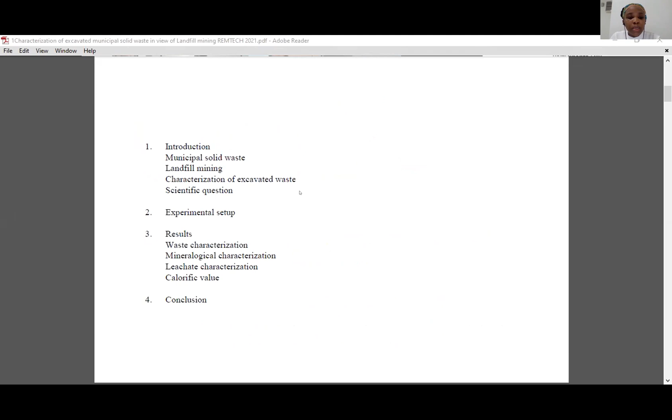In the last year, it has been found that the generation of municipal waste has increased, and it is expected to rise to 2.2 billion tons by 2025. Asia alone accounts for 70 million tons of municipal waste, and this generation accounts for 26% in Southeast Asia.

As we can see here, the kilogram per capita per day only in Malaysia has increased from 1.1 kg to 1.2 kg. Because of population expansion, there is demand for land as waste increases gradually. Among the 146 operating landfills, only 18 are sanitary landfills, so more than 50% of the others are still open dumps.

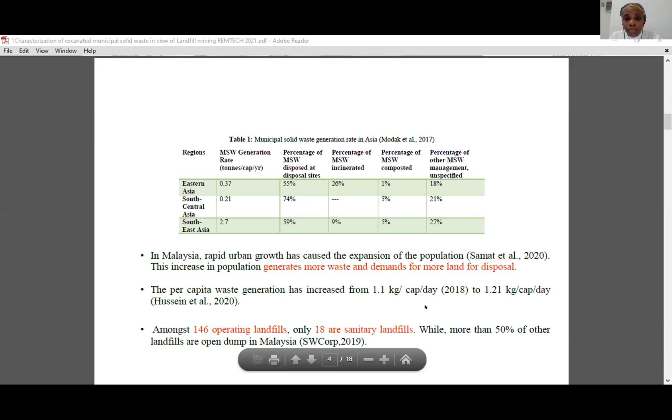Landfill mining comes as an opportunity to obtain minerals or other solid resources from excavated waste material. This method was first used in Tel Aviv in 1953, for the purpose of remediation but also to recover landfill space.

Is it really a solution for the Malaysia case? Our study will help us define and answer that question. But potentially, there is still not a great role in the segregation of waste, so most municipal waste ends up in the landfill because separation at collection is mostly inexistent, if not rare.

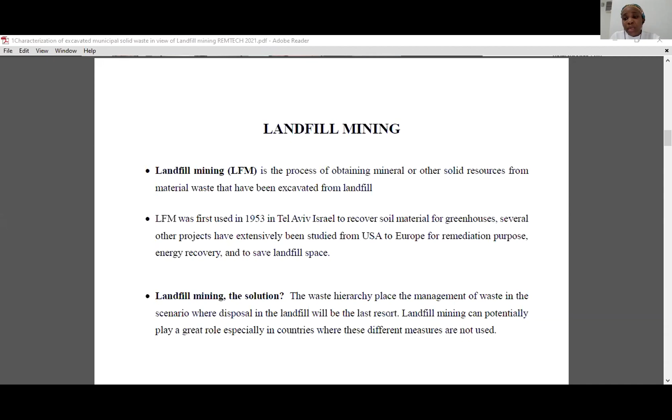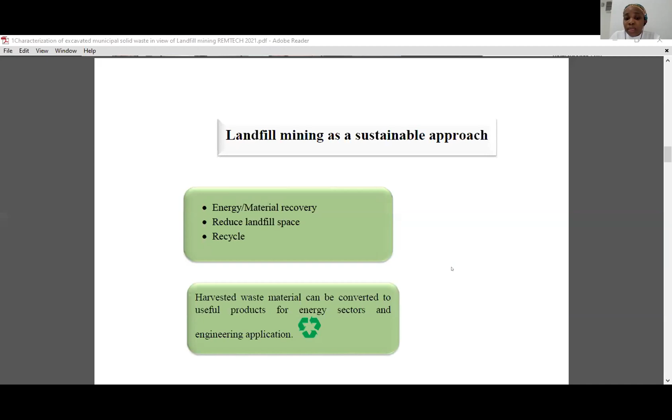Landfill mining as a sustainable approach can help us recover energy or material. In our study, the main objective is to reduce landfill space so it can be recovered for a recreational park, with the landfill converted into such a park. The material harvested will be converted for energy or engineering applications.

Our methodology: the waste was excavated from the landfill and collected at Jeram Sanitary Landfill here in Malaysia. After collection, the waste underwent characterization, and from that characterization, the opportunity for waste to energy was explored.

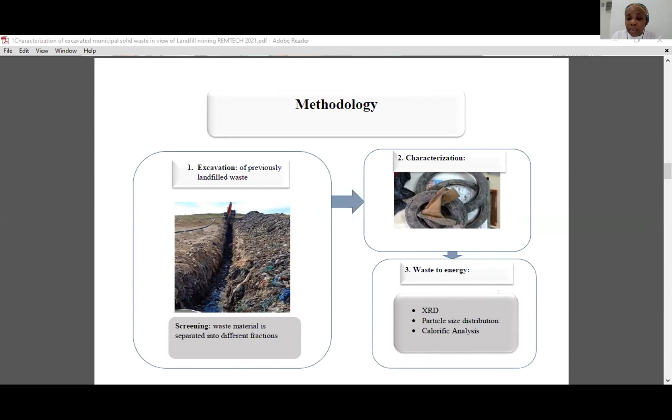We used XRD to determine the material in which energy potential can be found. We also used particle size distribution because we wanted to determine the fraction where the flow of the desired material is mostly found. Then we proceeded to calorific analysis to determine the heating value.

Some of the questions we asked are: what are the different types of material excavated? Does waste material characterization really influence landfill mining? And is it possible to implement landfill mining for profitable recovery in this case?

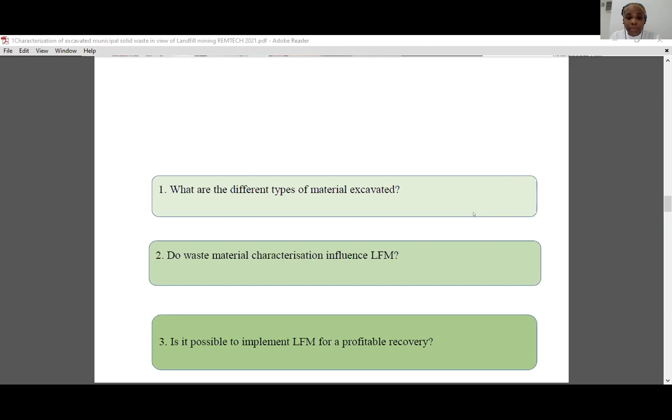Our experimental plan and analysis consists of step 1, excavation; step 2, characterization; and step 3, valorization options. After excavation, the material was dried, then sieved and separated into different fractions: plastic, metal, textile, wood, paper, cardboard, glass, and ceramics, then characterized through the different analyses previously cited. Then we explored the valorization options.

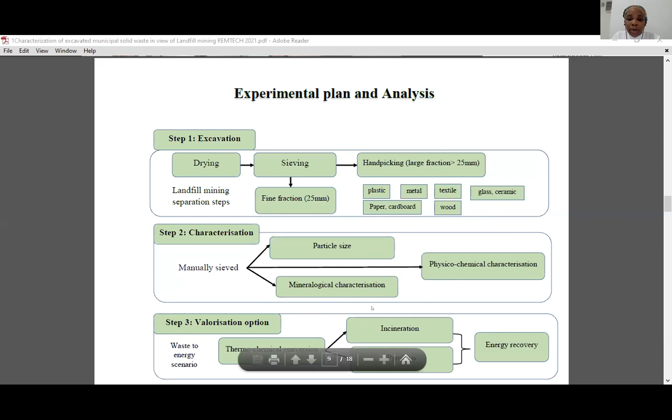The results show that among the excavated waste, we predominantly found plastics and fine material. That fine material, also called soil-like material, is mostly the organic fraction. Based on the physico-chemical analysis, the moisture content was also very high.

From the plastic, we also found that plastic is predominant, accounting for 36% of the waste composition on a dry basis, compared to fine material which was 34%. The combination of the two materials was also studied to know the potential for recovery, as well as studied separately.

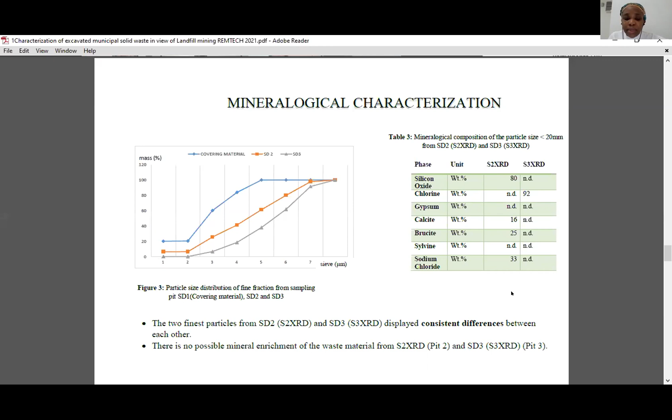And we found out also that there is a great amount of chlorine, and that was found in the pit, and in XRD. Also, the mineralogical analysis show us that...

the sample that undergone through XRD display the presence or occurrence of gypsum. That gypsum must be originating from the construction and demolition waste that has been deposited in the landfill. And one of the suitable treatments for this fine material will be...

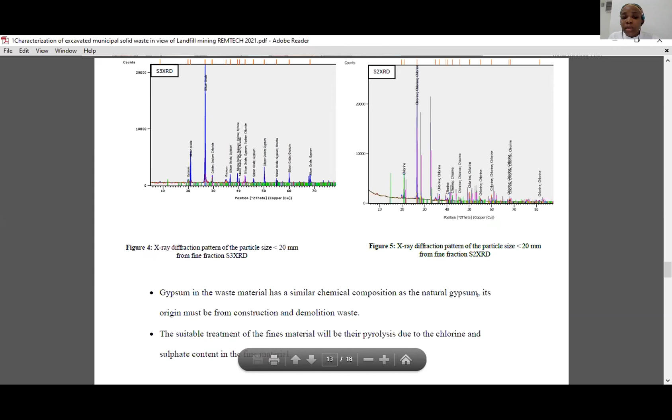pyrolysis, due to the chlorine and sulfate content that was found in the material. So the leachate characterization helps us to define which treatment can be done to the waste, because after excavation, we found out that there is a discharge of contaminants of new nature, which are methylene chloride, phenol, 4-methyl, and hexadecanoic acid, ethyl ester. These contaminants are mostly because of the heterogeneity of the waste and the degradation of the plastic

that have been piled in the landfill. So they are still occurring because of this heterogeneity. So more study needs to be done to know how the material and their occurrence affect the landfill mining.

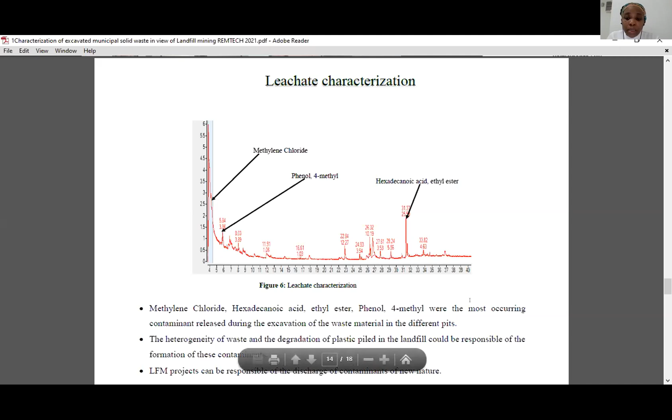The valorization option for one opportunity could be in the combustible fraction, which is plastic. And we have found out that the plastic has a potential to be recovered that is higher compared to the fine material. Based on the ultimate analysis, we found out that most of those materials, plastic and fine material, are

mostly bound to organic material in the waste. So the fine material can also be valorized as a fertilizer or compost, depending on the quality of the material that still needs to be studied. The geochemical analysis needs to still be done to define if the material is potentially viable for the landfill mining study.

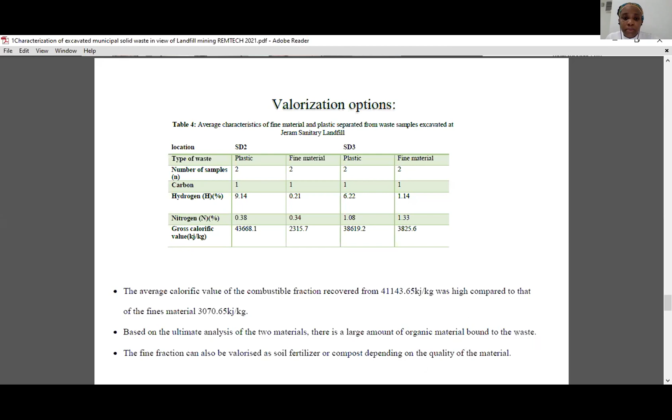So for the heating value, after separating the waste, the different materials underwent heating value and calorific value testing, and we found out that plastic also has a high potential of energy recovery compared to fine material. The energy potential shows a heating value of 166,897 kilocalorie per kilogram of the excavated waste, and the total recovered energy for that cell could be estimated to...

478,352.25 kilocalories per kilogram. So there is great potential for plastic, and for fine material or soil-like material, to be recovered from the landfill in order to process landfill mining.

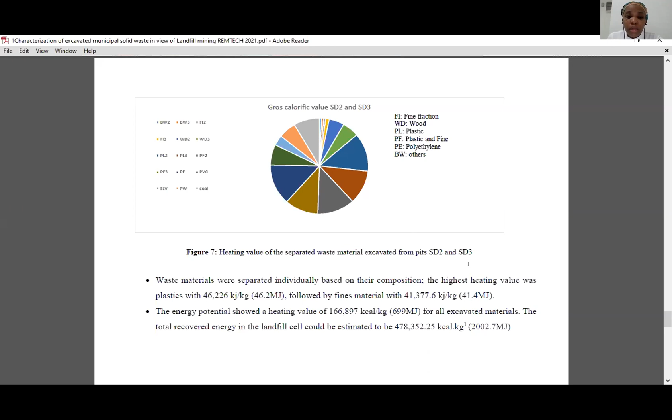So in conclusion, we have found out that plastic and fine material can be used for energy recovery. Their economic values still need to be explored, and further treatment for fractionation of those wastes needs to be done to optimize the energy recovery, and the quality of the excavated material still needs to be investigated.

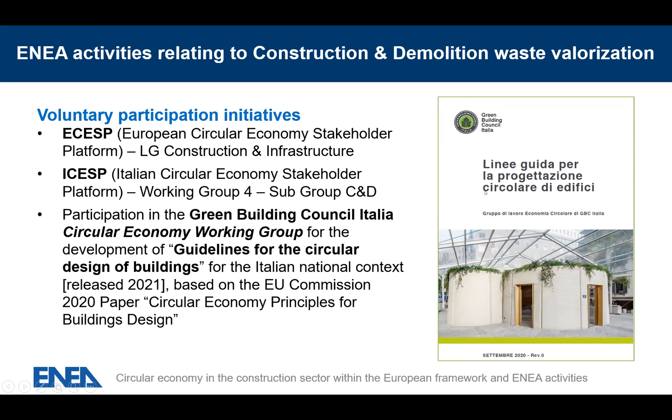In 2020, with the leadership group on construction, we published an orientation paper, which is public and available for everyone to download, where the leadership group defined 6 priority areas of intervention to promote circularity in the construction sector. Just to give you an idea of what we've been working on together with other relevant stakeholders in Europe.

We identified, for example, that integrated policies and governance, as well as metrics for circularity in the construction sector, are needed, but also integrated tools to foster interconnections between the construction sector and other productive sectors that could have exchanges in terms of flows of materials usable within construction.

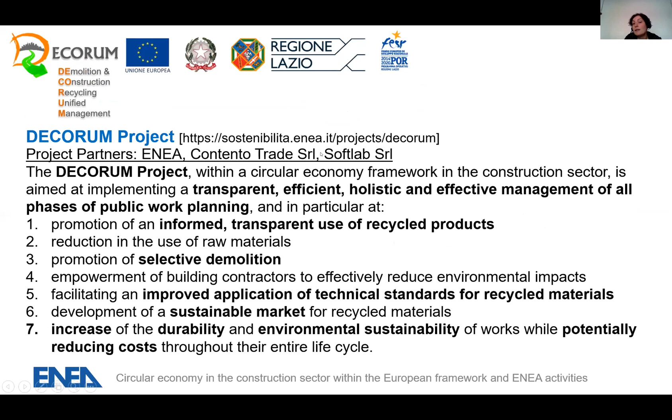This project led to the creation of a platform in support of all actors within the construction supply chain, to help them in the decision-making phases, and in order to facilitate the inclusion and adoption of secondary materials for the construction sector, and in order to promote the compliance of works with sustainability criteria.

In particular with our national minimum environmental criteria for green public procurement, which are mandatory. And this platform also has a marketplace that promotes the availability, reliability, and accessibility of secondary materials for construction.

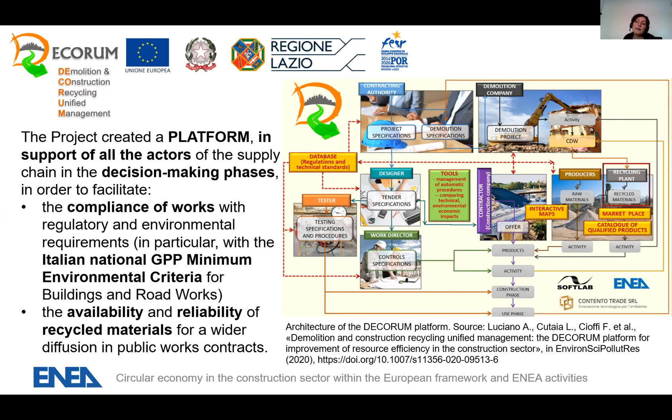Within the ESPA project, ENEA is working, as I said before, on many different tools to transfer all these innovative and circular approaches to public administrations.

In particular, we've been working on 3 tasks, 3 different activities: one concerning environmental certifications for public buildings, so we've been developing guidelines for public administrations to adopt these rating systems for buildings. And then we've been developing 2 specific activities on circular economy for the construction sector.

One regarding the preparation of guidelines to estimate the quantities and typologies of materials that can be recovered from existing buildings, so in an urban mining approach. And the last activity regards a report that has already been published and is available upon registration at the link you can find in the slides, a report that collects and systematizes different methodologies and technologies available to recover components and materials from existing buildings.

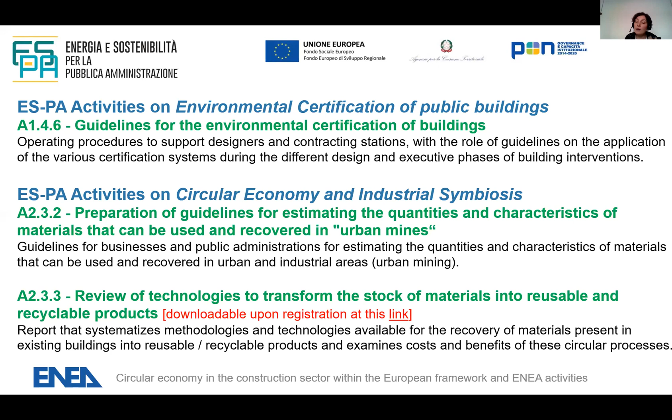So this report looks at selective demolition and different technologies to recover and make components available for reuse, or materials available for recycling.

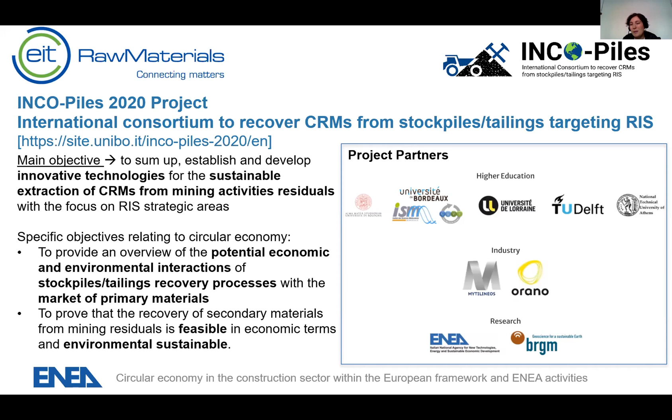One last project, to be presented by our colleague Francesco Tinti later this afternoon, is the INCO-Piles project, financed by the EIT within the KIC raw material. It looks at the possibility to recover critical raw materials from mining activities residuals, known as stockpiles and tailings. At ENEA, within this project, we are looking at how these circular processes might represent a real occasion for sustainable economic development, and we are assessing the environmental impacts that can be avoided by recovering critical raw materials from these residues instead of mining them from primary sources. These projects will be described later in more detail.

Thank you very much. I'm here for any question.

Paula, thank you very much for your exposure. I would like to ask everyone, do you have any question for Paula? Anyone? No doubts, people. There also might be some questions in the chat, to be discussed during the discussion session, so maybe it will come. Juliana, we don't take questions at the end of the speech, just in the discussion panel. The end. Okay, perfect.

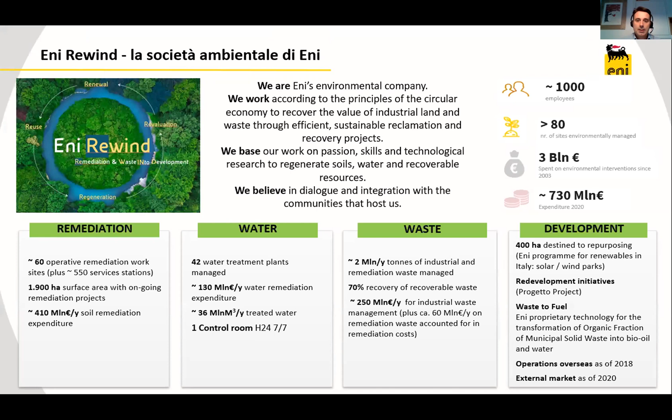Before going into the details of this project and this technology, I would like to provide some information about the framework, the context. We are in Italy. In Italy, we apply municipal sorting waste collection. In 2019, we reached 61% of sorted waste collection, with more than 18 million tons of waste sorted in this year. Of this amount of waste, the main impacting fraction is organic waste, which in 2019 amounted to more than 7 million tons of waste. So you can understand we are speaking about quite half of the entire sorting collection.

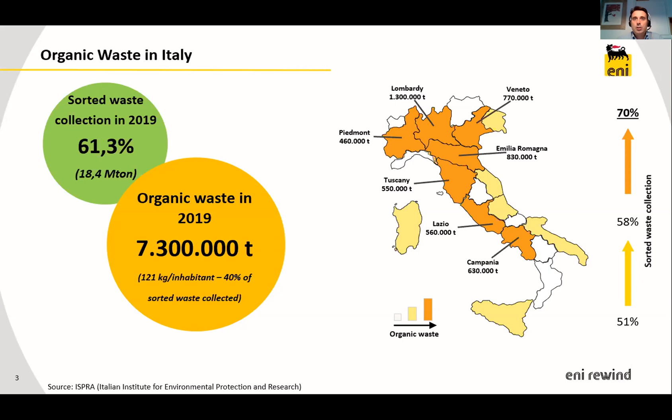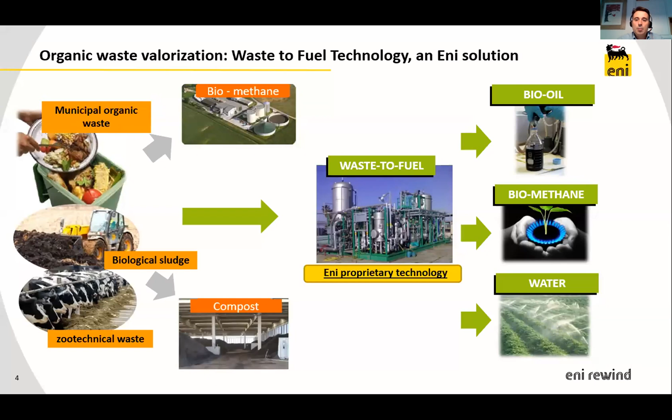So organic waste is one of the most important portions of sorted waste we have to manage in Italy. Currently, there are 2 technologies commonly used to manage this typology of waste: anaerobic digestion, which allows production of biomethane, and composting, which allows obtaining compost. The solution proposed by Eni is a third way, named waste to fuel, and as we will see in the next slides, it allows production of bio-oil, biomethane, and water.

The technology patented by Eni comes from the Research and Development Department of Eni, and it tries to emulate what nature already does. We know that hydrocarbons, coming from organisms captured underground, after millions of years can be extracted and transformed into fuels. In a similar way, starting from organic waste but applying a technology where, in a very limited time, about 2-3 hours, through a process of hydrothermal liquefaction, we can obtain a bio-oil with characteristics really similar to fossil fuel, which can be used in a similar way to produce fuels for automotive, for example.

In a waste-to-fuel plant, we have several sections. The first section is a pretreatment that removes components not related to the organic fraction, like wood, plastics, and metals that can be present due to errors in the sorted collection. After that, we have a grinding and homogenization phase that allows us to obtain organic waste ready to be sent to a reactor. The reactor is the core of the technology.

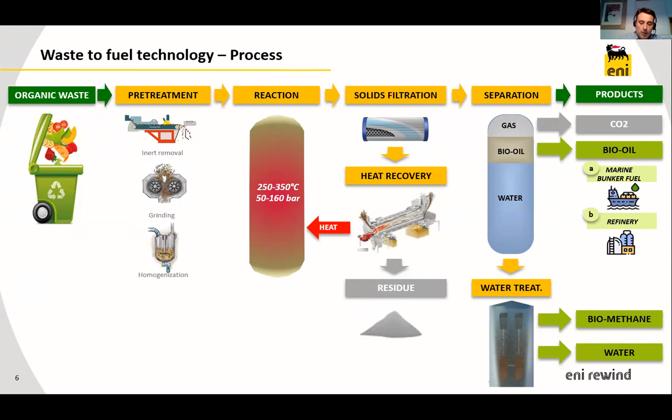Coming back to the gas-liquid solution, through a separator we can remove CO2, and then the liquid part will be separated into bio-oil, the product that will be commercialized, and water that will be sent to a water treatment section, where we can also produce biomethane and recover the water originally contained in the organic waste. So to recap, starting from the organic waste on the left, we obtain through this process 3 products: bio-oil, the characteristic product of this transformation, biomethane, and water.

The yield of this transformation varies depending on the composition of the organic waste, in particular depending on the solid content, and especially on the percentage of fatty substances and proteins. The bio-oil, depending on those characteristics, can vary in yield from 3 to 16% of the total waste input.

The other products include biomethane, obtained during the water treatment process because we also apply anaerobic digestion of the water, but this is a very small quantity, around 1% of the total waste input. And finally, we have the water.

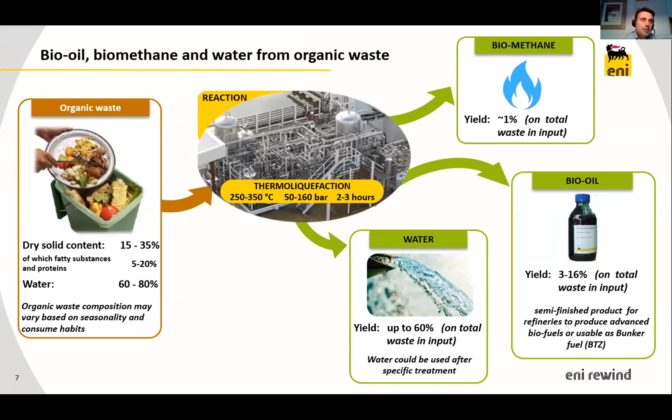The organic waste is mainly composed of water, which can reach up to 80% of the total composition. We are able to recover an important portion of this water, up to 60% of what is originally contained in the waste.

Due to these characteristics, we can use the bio-oil produced through this transformation directly as a marine bunker fuel for maritime transportation, but in formulation with traditional fuels because we have to reduce the acidity. Otherwise, we can use this bio-oil to produce electricity or in refinery processes to obtain traditional biofuels, for example for automotive use.

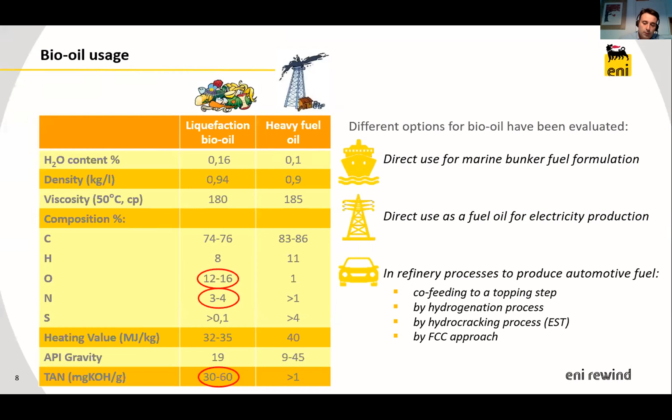What is the status of implementation of the technology? The technology was tested for the first time in 2013 through an experimental plant built at the Eni Donegani Research Center in Novara. It was a very small plant, but really important because it demonstrated that the transformation was effective.

Then in 2018, a new plant was built in Gela. It's a pilot plant, a larger plant currently in operation. Thanks to the information collected from this plant, we are also designing the first implementation on an industrial scale, which we expect to realize in Porto Marghera, close to Venice.

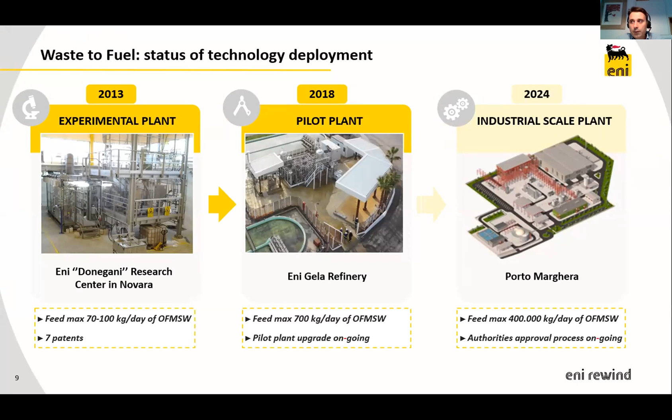We use this plant to organize long-run tests that allow us to collect information about production in continuous operation, to verify the overall process, verify the design, and collect lessons learned useful for the industrial scale design. We have also started some activities to upgrade this plant because, collecting information about this technology over these 2 years, we were able to define some opportunities for improvement. So we are also doing some upgrading activities that we expect will improve the performance of this technology.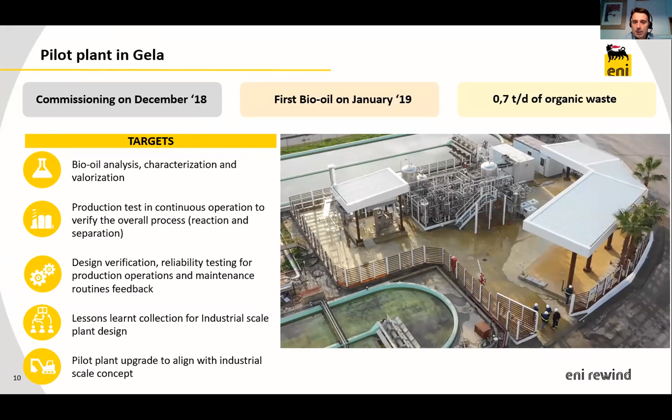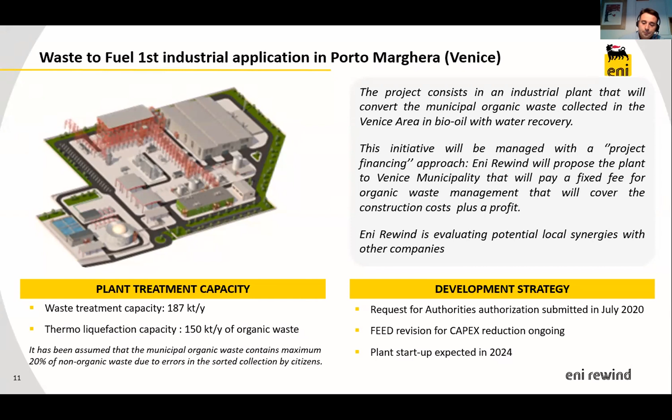The first element I want to highlight is the production of a bio-oil that is quite similar to heavy fuel oil, but with a very low sulfur content. It's a very interesting product that can be used directly as marine bunker fuel or as input for refineries to produce biofuels. The second element is the recovery of water, considering that more than 70% of organic waste is water.

We can really recycle a huge amount of the waste that is put into the plant. We can also produce a small amount of biomethane.

The technology is a very low emission technology because we have just a very small production of CO2, which can also be captured, purified, and commercialized.

Another characteristic is the reduced soil usage compared with traditional biogas and composting technology.

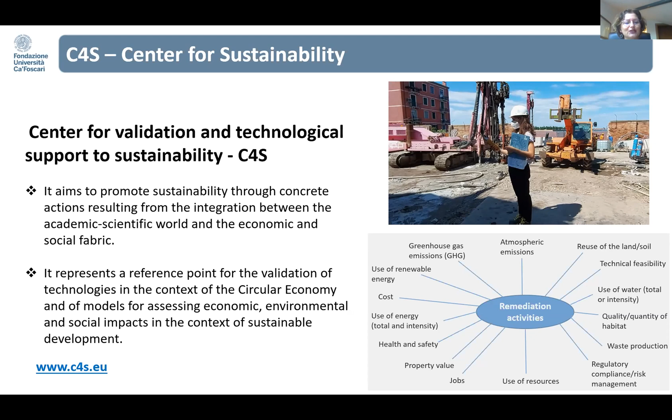Why did MAPEI, TEV, and the local environmental agency ARPA need our support? Because stabilization solidification techniques are not well regarded. Heavy metals, which all of us know cannot be degraded, represent even now a big issue, due to the difficulty for authorities and citizens to accept the use of a stabilized matrix which still contains the contaminant.

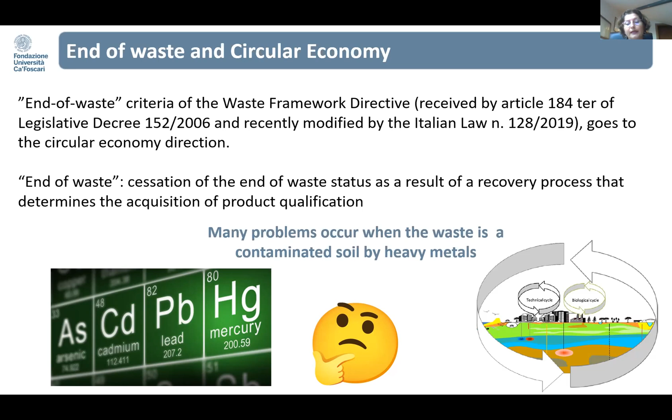It's a big issue, and now the remediation approach is often the dig and dump or the confinement, which are not a sustainable solution at all. In this case of inertization, a third-party endorsement, in addition to the usual checks carried out by the control bodies, had helped the end of waste approval, and thus the possibility to reuse the remediated soil in situ and to certify the remediation as well. But much more than this, the authorities certificated that the treated material is an end of waste that can be used also for other applications, such as inert in the concrete formation. And as some of you already know, the HPSS, that means high performance stabilization solidification,

is already a consolidated technology applied since 2006 in more than 15 contaminated sites. And I already presented at Remtech Europe in 2013 the evaluation of the sustainability of this technology. The technique is particularly sustainable as it allows the use of the stabilized soil and greatly limits the disposal. So it is more environmentally sustainable. It is cheaper than other solutions and more acceptable from a social point of view.

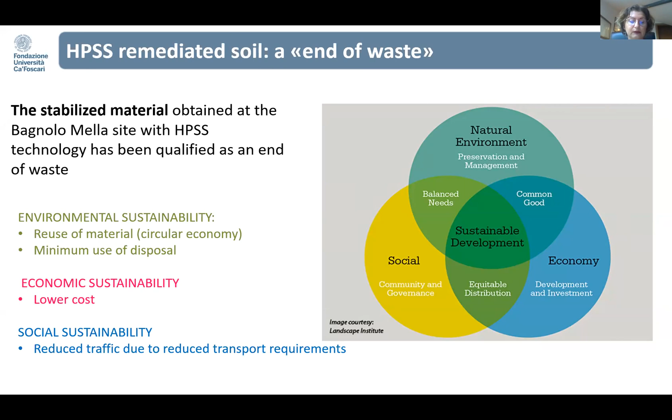But the new Italian law regarding the end of waste had raised some doubts about the possibility of declaring the material as an end of waste, especially in the case in question where the ground was heavily contaminated by heavy metal and by pyrite ashes. The performance control was therefore particularly important, as I'll present to you very soon.

The HPSS has over time proved to be a technology that gives guarantee of durability and high performance. The cement-based technology transforms the fine soil fraction into a high-density, low-porous, and mechanically resistant granular material that can be reused for backfilling and looks like a synthetic gravel.

It is based on a technology that is based on high-performance concrete, the science that studies additives and mixing design, able to realize concrete that allows very large construction and durable buildings, for example, the tallest skyscrapers in the world or the biggest Chinese dam.

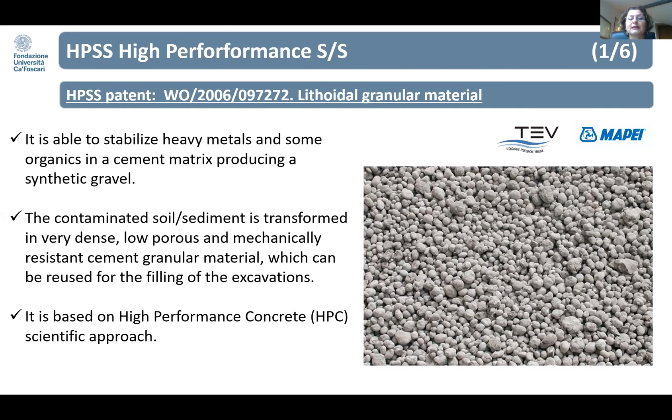In relation to this formula, which relates porosity with the water and cement ratio, the Walton formula: the more you manage to decrease the water cement ratio, thus putting less water in the mix, the lower the porosity will be. So the capillary porosity can be significantly modified through the water cement ratio, and the capillary porosity determines the durability and the mechanical resistance of the cement-based material, and also its water permeability.

Which is virtually zero for a water cement ratio of 0.32. Thanks to specific additives called MapePlast ECO1, it is possible to reduce the water cement ratio and obtain high performance inert soil.

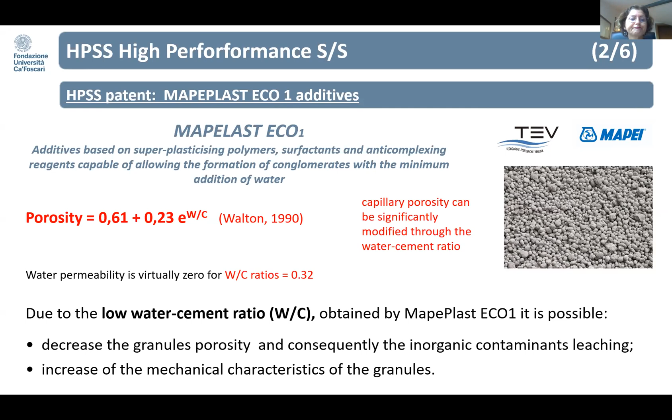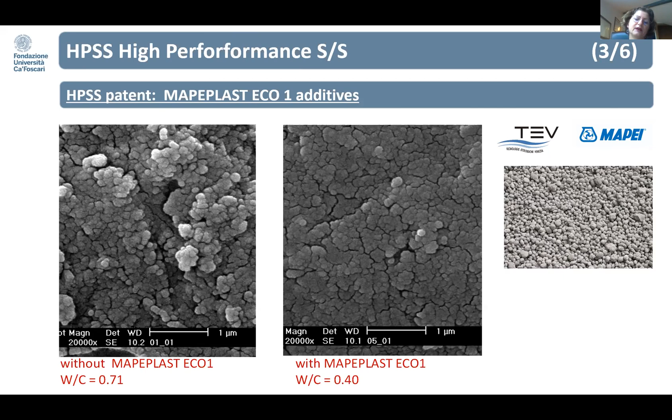Those two images show the difference in the matrix with or without the additive, and the relative water and cement ratio that can be obtained using the additive, which goes from 0.71 without the additives to 0.40 with the additives.

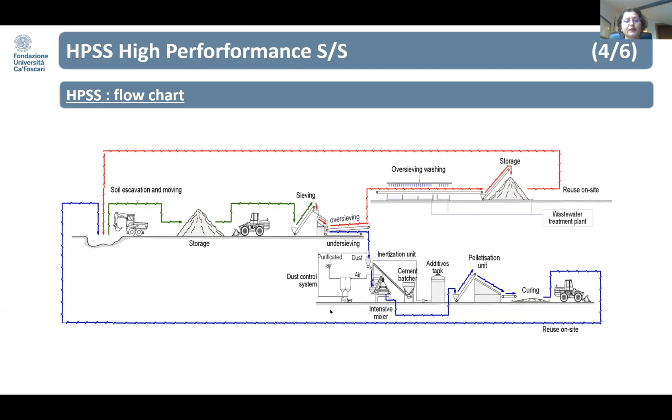And here you can see the most important phases, which are also very simple: that is the mixing first, and the granulation phase after. The mixing design is generally provided for...

70% of soil fine fraction, 25% of Portland cement, and 2% of additives, and the rest, about 3%, of water. And then there is the granulation phase, which due to the so-called avalanche effect produces spherical and granular materials, whose dimensions can be decided and varied within a certain range, from a few millimeters to a few centimeters.

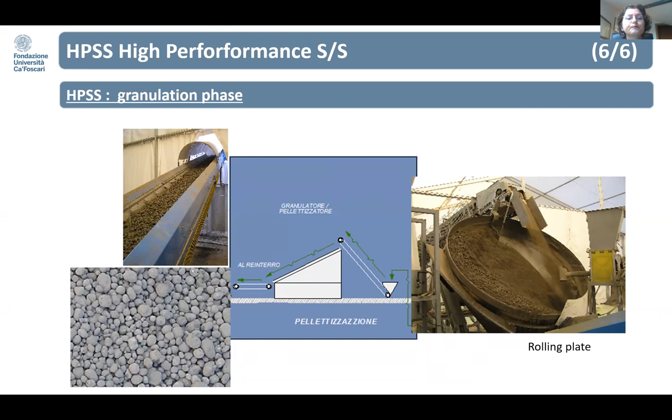Now let's move on to the case study, which is a particularly significant case. It was in fact an abandoned industrial area where there was a chemical fertilizer factory with ovens for the production of sulfuric acid in lead chambers, obtained from the roasting of pyrite, whose ashes were scattered in the southeast area of the plant.

The industrial activity determined a soil contamination by heavy metals, in particular arsenic, lead, copper, cadmium, zinc, and cobalt. And here in this table, the table shows the maximum concentration value of the main pollutants found during the characterization plan. So as you can see, we had very high concentration levels of arsenic, copper, and lead, with the highest concentration levels, but also the mean concentrations are very high.

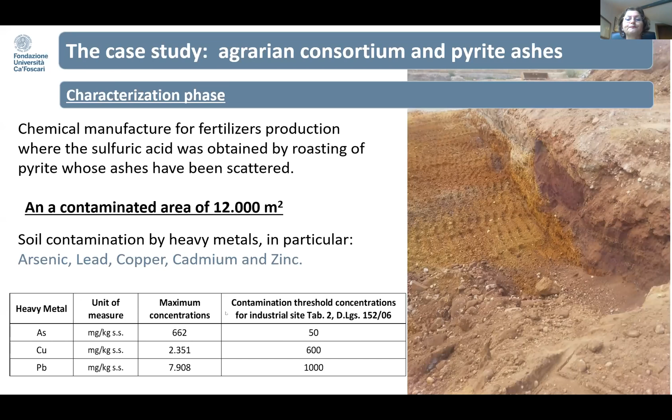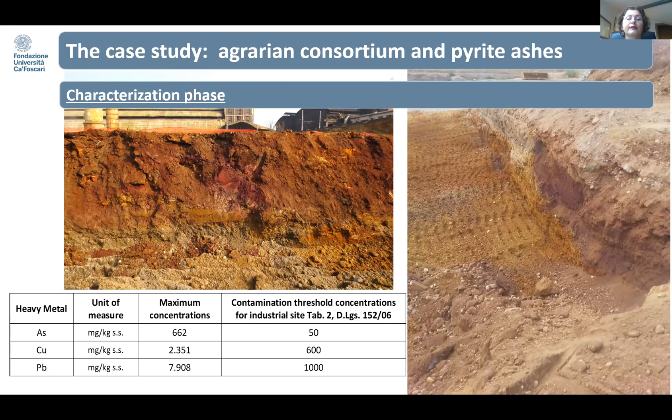And here you can see the bright red pyrite ashes. Think that for the level of iron and the level of lead, in some points the soil had a density of more than 2 tons per cubic meter.

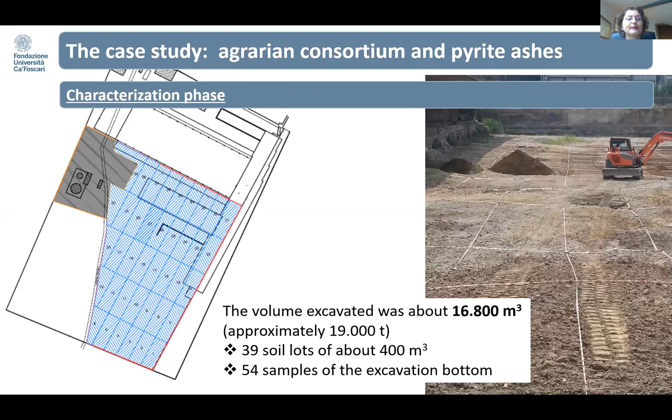The excavation operation had produced 39 lots of about 400 cubic meters each. And similarly, the monitoring plan provided for checks on 39 lots of granulate produced, with very strict and continuous control.

The performance verification protocol included the Los Angeles crushing test, which measures the abrasion of the material, the leaching test, ecotoxicological tests, and also the monitoring of the groundwater after the refilling.

Foscari perform a lot of sampling, and ARPAV analyzes 85% of the sample for the leaching, and then 100% of all the samples for the toxicological test.

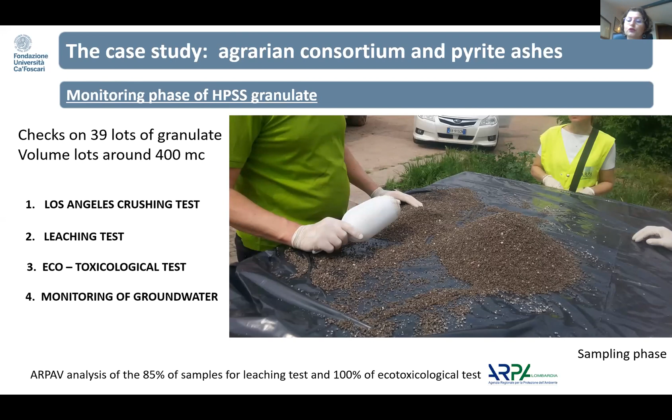Some results: the Los Angeles test for the verification of the mechanical properties are under the limit of acceptability. We need less than 45% of crushing in order to have a material that can be used for the road foundation. So this material can also be reused for the road foundation.

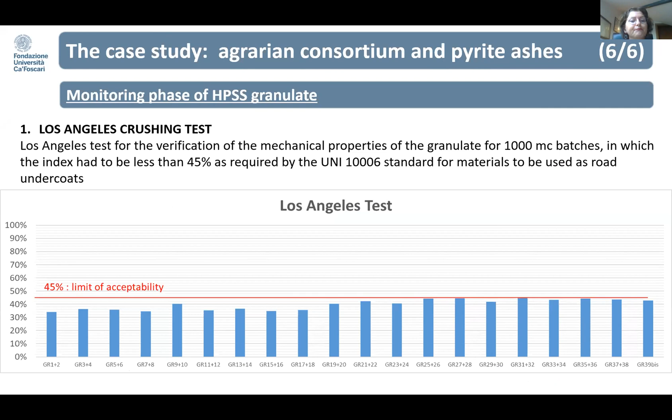Here you can see the results of the verification protocol of the leaching test. The protocol provides for analysis of 8 polluting elements present in the soil. Zinc, cobalt, vanadium, and cadmium have always resulted below the detection limits, while only 3 elements show quantity above the detection limit in the leaching test: arsenic, copper, and lead. In any case, all results were below the limit for waste recycling.

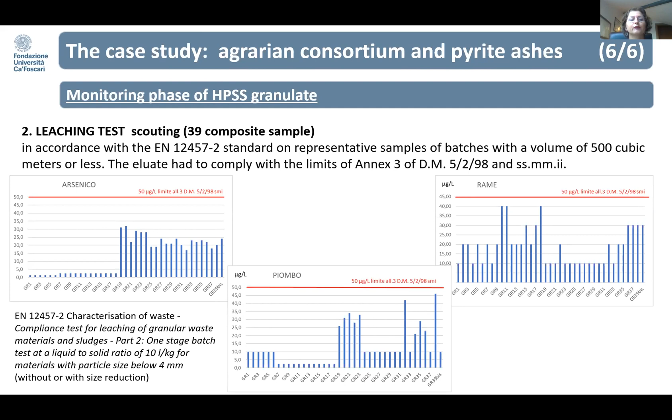Then the ecotoxicological test, we carry out every 3,000 cubic meters of material, performed directly by the environmental local agency, ARPA, where liquid phase bioluminescence inhibition test with Vibrio fischeri, an algae growth inhibition test, and the immobilization test with Daphnia were conducted.

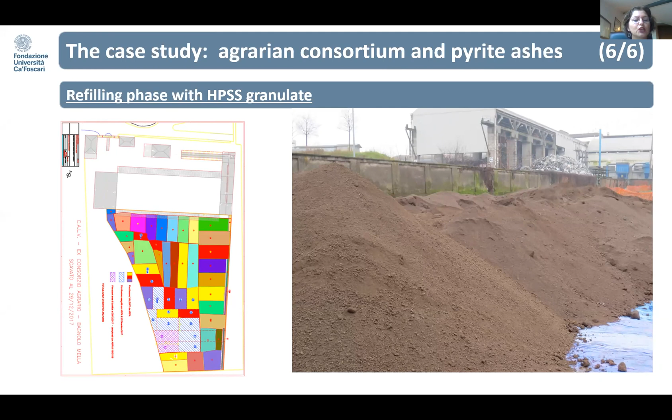So, concluding, after the refilling with the granulate material, the environmental agency performed another sampling. This is particular, using a statistical approach of the standard 15310, they found the number of increments necessary to have a representative sample of all the total material inside the treated soil. So they sampled 56 increments to obtain a final sample at 2 depths, 1 and 2 meters.

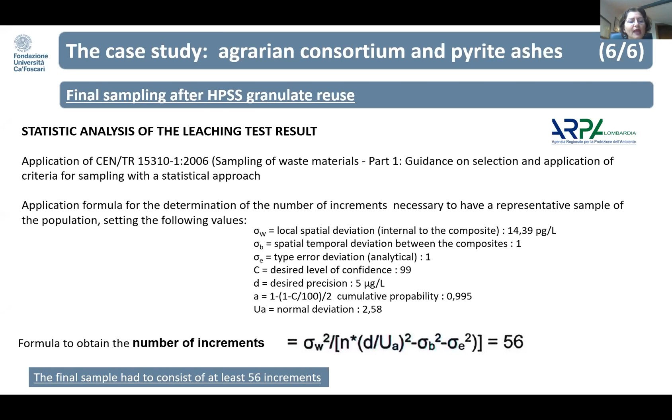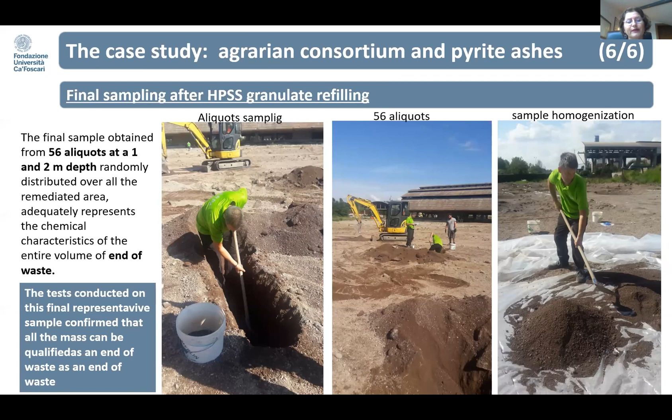The test conducted - here you can see how the soil looks at the finish of the remediation, and this is some photos about the ARPA sampling, about these 56 increments. The test conducted on this final sample confirmed that all the mass can be qualified as an end of waste with a confidence of 99% and desired precision in sample.

So final remarks: circular economy requires new technologies, and the raising of the skill also, above all, of the members of the local service conferences who approve and certify the project, in order to take the right risk, and not to be scared about a new technology, a new application.

We have the last remarks regarding the leaching test required. As in Italy, we perform for waste the EN 12457, part 2, that is not suitable because the stabilized granular material needs to be smaller than 4 millimeters in size, in order to avoid size reduction by crushing. Then, as you can imagine, powder crushing affects the performance of the leaching, of course.

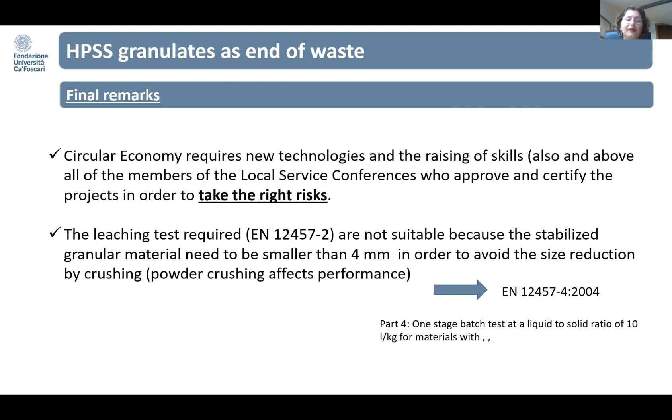So we suggested to perform part 4 of this test next time. That means you can use the granular material as is, because you can perform this one stage batch test on soil of a size of 10 millimeters. So this is our suggestion. I need to say thank you for your attention.

And please, if you want to share. So this is, okay, perfect. Can you see the screen?

Yes, perfect, thank you. So I'm here to introduce CONDEREFF. CONDEREFF is an Interreg Europe project funded by the European Union.

Its main aim is tackling the policies regarding construction and demolition waste management for improved resource efficiency.

My name is Elisa Peñalvo, and I will be speaking about the project, since we at Polytechnic University of Valencia are coordinating these activities. Other entities are also participating, such as Enea and other regions that I will name later.

So what's the context of this project and how was it born? How is it possible that there was interest in Europe, and how did the idea come out? One easy thing to understand is that construction and demolition waste is one of the heaviest and bulkiest waste streams in Europe.

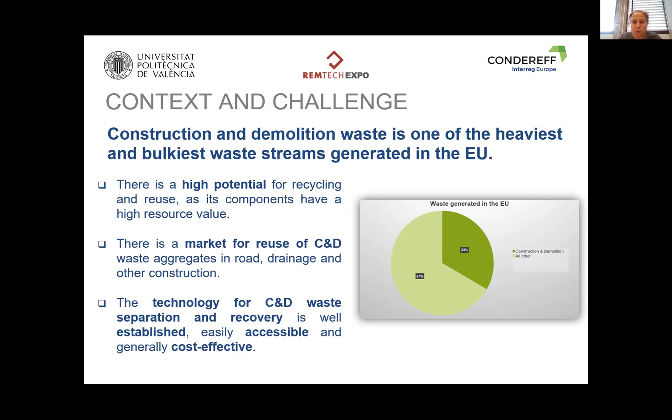We realized there's high potential for recycling and reuse, which could become really high value for the market. During research for the proposal, we identified a market for reusing this construction and demolition waste as aggregates in roads, drainage, and other construction. The technology was already there, ready and accessible at a reasonable cost. These were the main motivations to propose and carry out CONDEREFF.

So what was the next step we identified for CONDEREFF? During the process of studying the background and context of construction and demolition waste management, we realized there were many different approaches on how to tackle the issue across EU regions. We were missing cross-country comparison and especially cross-country collaboration. There were many best practices in other countries that could be implemented elsewhere, and vice versa.

But there were still several countries that needed a push in confidence. They needed to understand that the quality of those recycled materials was good enough to be implemented as an added value product.

This is where the ideas from all the different participating regions across Europe are put together. We are improving policies at the local level to enhance and promote this kind of quality construction and demolition products. So we're not talking about waste anymore, we're talking about added value products that can provide a lot to the market and be received well within it.

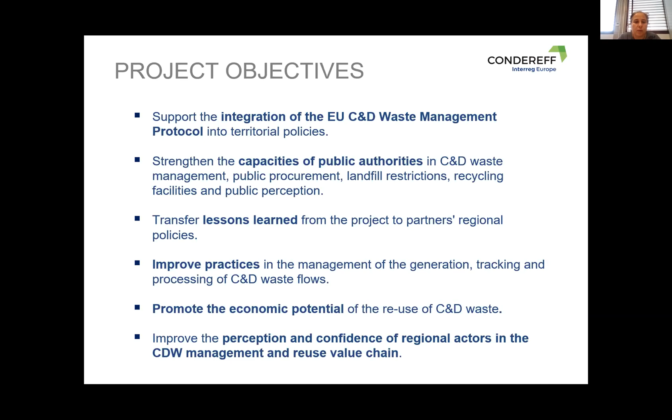Of course, ENEA is one of the main research actors within the project. The Lazio region represents an Italian region, the Styrian government represents Austria, and finally from Germany, a research institute called ISW.

So what are the activities that we have carried out during the project? It has a duration of 5 years. Right now we're in the second phase, so many of the activities have been implemented, and in the second phase of the project the idea is to implement the different outcomes of the project.

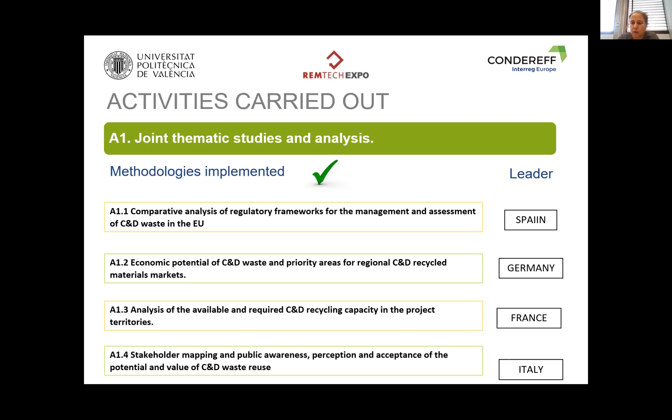In our case, we developed an economic potential for C&D waste and priority areas, which was developed by Germany. We analyzed the capacity of different territories for recycling. And finally, Italy did a wonderful job mapping the public, the stakeholders, and public awareness, perception and acceptance of the potential and value of construction and demolition waste reuse.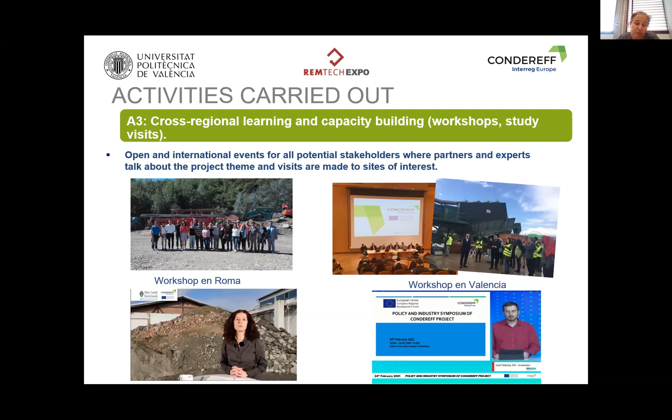Here we have an example of the cross-regional learning and capacity building. That was before the pandemic, when we had the chance to have in-person workshops and meetings. Since then, different partners have presented their work, but mainly, unfortunately, it was online.

Regarding the policy improvement tools and resources, as I mentioned, we identified approximately 20 best practices across the different stakeholders within the project and all the participant countries. We shared and uploaded them to the website to make them available for everyone, and to make sure our regions have the chance to check them out.

And we have also identified cost and benefits of best practices. So from all the different practices, we approached and made the analysis from a cost-benefit or economic perspective.

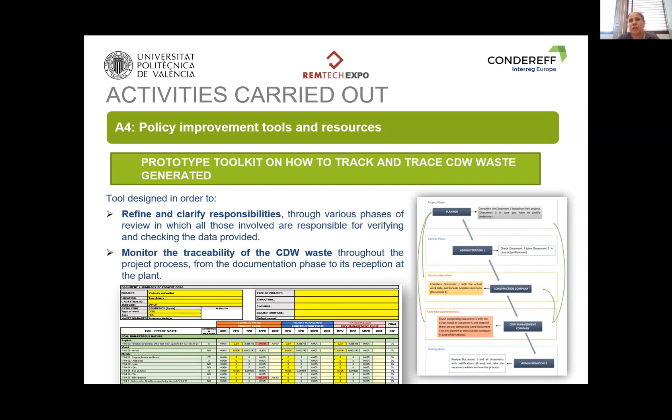As I mentioned, we also developed a tool where we can track and trace the waste generated at a construction and demolition site. This is going to be implemented in 2 pilots in the next 2 years within Spain.

So far, this is from my side. These are the websites, and if you decide to follow up, we still have 2 years to go. So we still have an action plan to follow and implement all the different actions that we mentioned in the previous slides. So I remind you for your questions, if you have any.

And I just want to say thanks to the organization and ENEA for inviting us to this forum to give and provide visibility to CONDEREFF, which I think is very necessary nowadays.

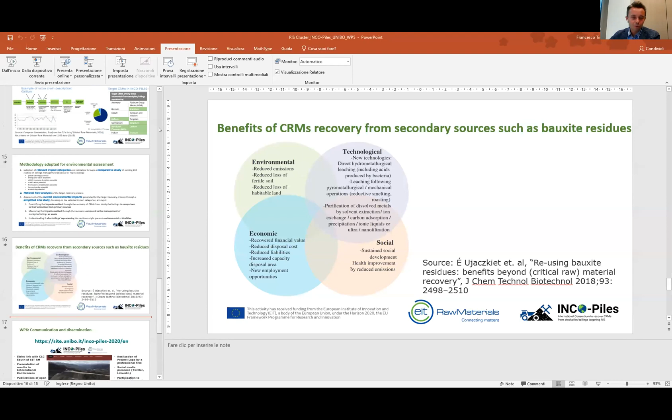Thank you very much for the invitation to this workshop. This is Francesco Tinti from University of Bologna. I belong to the Georesource and Geoengineering group of the engineering department of University of Bologna, and we share the legacy of the old mining school of the engineering faculty of Bologna, which, as you may know, was suspended in the 80s.

This project is financed by EIT Raw Material, and in our mind it was a mining project, in fact, in the new era, the circular economy era. It comprises many partners, among which ENEA, thanks to Paola and Laura, Dr. Cutaia, and many others, some from exploration, some from excavation, and some from processing - the classical stages of mining.

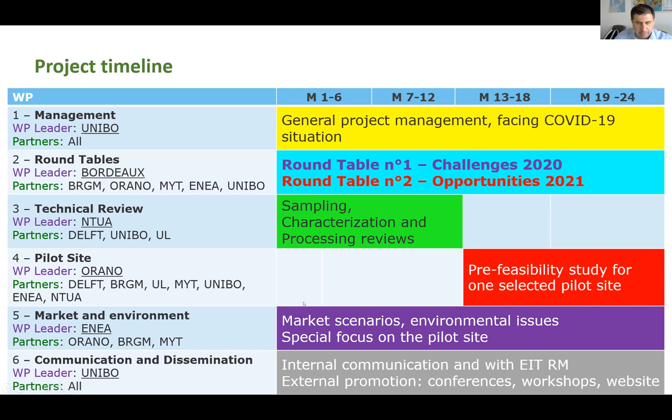Along the way, Enea worked on market scenarios and environmental issues related to green mining, with special focus on the pilot site. And, as in all projects, there was management and communication.

I will briefly describe the general main activities, and then focus on the work package regarding environmental and market issues. Work package 1 was organization, so we had to manage this in the COVID era, which was not so easy. Then we organized these 2 roundtables with experts, the first in Bologna, both in hybrid mode.

Some people managed to come to Bologna in December 2020, but overall in Athens, joined with the RawMat 2021 conference, which was a very big conference with more than 2,000 participants in presence and others online, about the topic of raw materials and circular economy. There we discussed the issues with a wide audience.

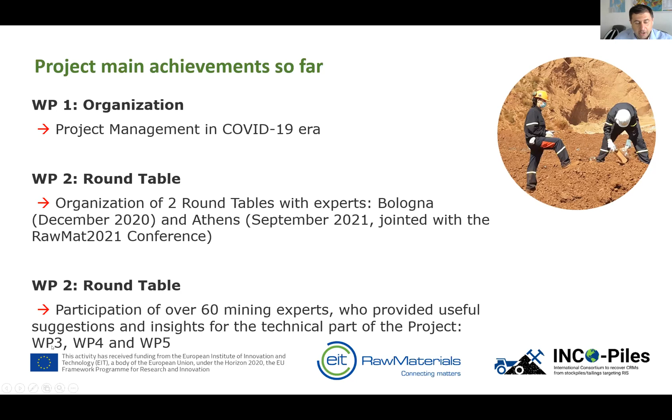Over 60 mining experts provided useful suggestions and insight for the technical parts, which were basically work package 3, work package 4, and work package 5.

Regarding work package 3 as technical achievements, we realized 3 comprehensive reviews. As I anticipated, we realized a small database of mining residuals in the area, because there is not so much information available. Among those, we selected 8 potential case studies which had some interest for recovery of raw materials.

Among these 8 selections, we chose the bauxite tailings in Greece, on which we performed sampling strategies using satellite images to create a grid based on sampling strategies and material flow analysis. Over that, we performed a big grid of samples, which are now under examination from the labs of Orano, BRGM, and Technical University of Delft.

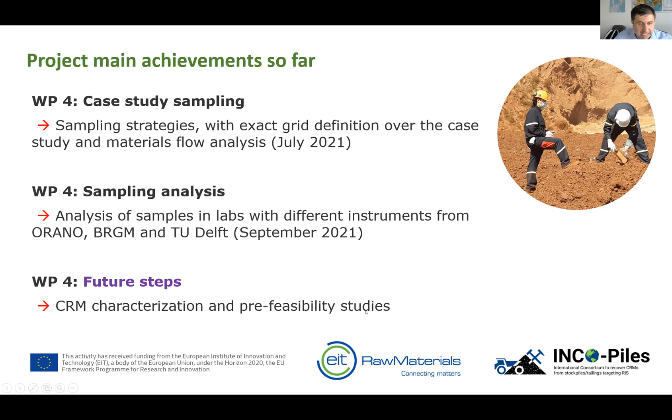For future steps, according to the analysis, we should characterize critical raw materials in this tailing and provide pre-feasibility studies for future projects. Now I'm focusing on work package 5, which I think is also the most interesting for you.

Partners involved were mainly Enea as work package leader, together with BRGM, which has a life cycle group, University of Bordeaux, and the companies providing the main data: Orano regarding the management of nuclear tailings, and Mytilineos because it's the owner of the pilot site.

Work package 5 provides an overview of the possible economic and environmental interactions of stockpile tailings recovery process with the market of primary materials, in order to highlight economic and environmental strengths and weaknesses of the circular approach in the mining sector, with the goal to demonstrate that this recovery is feasible both in economic and environmental terms.

And to prove that this exploitation of critical raw materials in Europe, from mining areas of Europe, can represent an opportunity for sustainable economic development.

As you can see, circular economy here is declined in not a very circular way, because there is the insertion of raw materials with the extraction phase. We are working, from one side, on insertion of raw materials by studying the tailings, and from the other side, trying to prove circularity from residual waste across all parts of the circle in the mining sites.

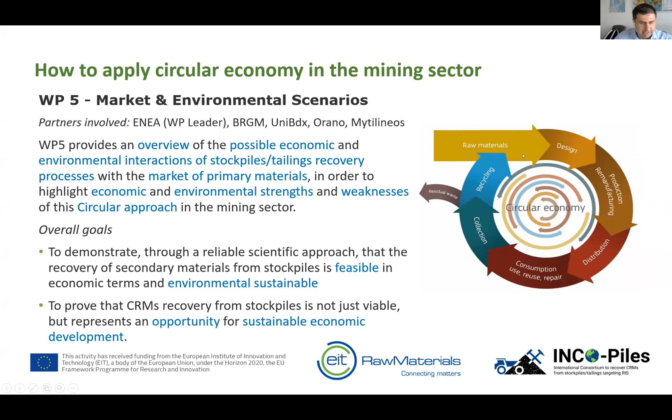At the same time, there is the need to assess supply and demand market dynamics, with analysis of the value chains of critical raw materials potentially recoverable from this site, and in general from abandoned mining areas, plus assessment of environmental impacts in a life cycle perspective with material flow analysis and, for now, a simplified LCA study.

Expected results are an example procedure for combined environmental and economic assessment, because at the end, to really extract material from waste means to touch that waste.

And to touch that waste should have an economic advantage for the company doing it, and an environmental security for the regional authorities, because static waste can be non-hazardous, but when it's touched again, it can become hazardous. And these are the targets.

Here we can see an example of value chain description for gallium, which is one of the targets the consortium has individuated. Here in green are all the possible, probable critical raw materials present in the bauxite residue of Mytilineos, since the analysis is ongoing. These are the ones we would like to focus on. Scandium is very much studied together with bauxite and aluminium for some processing reasons, but we want to focus also on others with very low concentration and grade, but with potential.

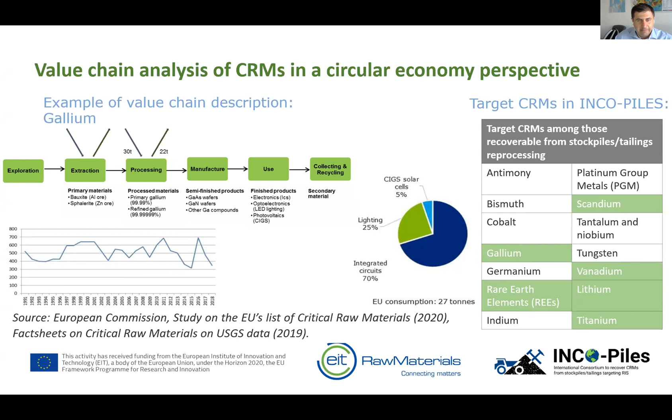So relevant impact categories and indicators have been selected for this tailings management. Material flow analysis was done, and these environmental impacts, thinking of a recovery, have been highlighted and described. We tried, on one side, to quantify the impacts avoided by recovery, for example of gallium from the case study, instead of extracting from a mine in China. And on the other side, to understand if after tailings reprocessing the residues might present environmental criticalities, among which we discussed the radioactive content of these tailings after reprocessing.

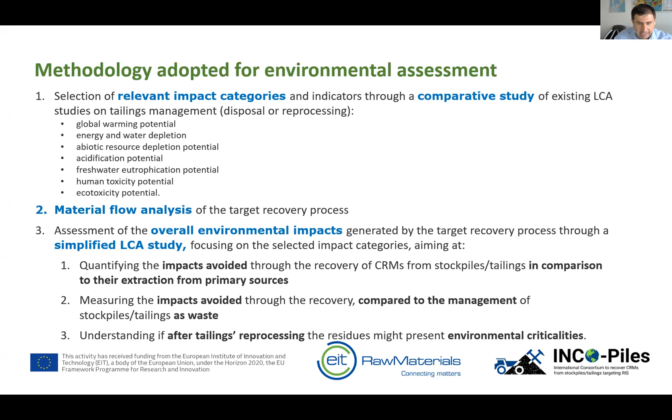Another thing I want to highlight is that legislation now treats these mining residues as waste, based on Directive 2006, which provides information on how to treat this waste, but considering them as waste. The idea would be to push public opinion in general not to consider them as waste, but as secondary resource, exactly as for urban mining. These are some benefits in critical raw material recovery from this secondary source, which we want to call secondary source, not mining waste. This was a general paper which evidenced, in qualitative terms, all the benefits of doing this activity.

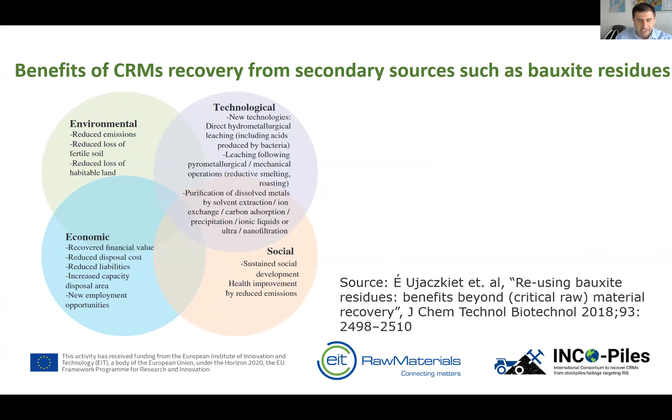Finally, I conclude with work package 6, communication and dissemination. We have a website which I invite all of you to visit if you are interested in more information on this project and its achievements.